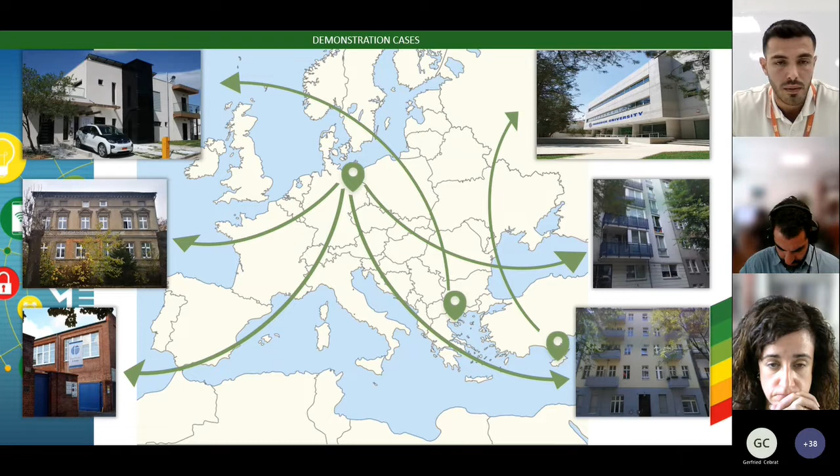In Germany, we have 4 different case studies, one of them being a multifamily home with 6 apartments. Then, on the bottom left, it's a metal factory, and there are also 2 more buildings more than 100 years old. In Greece, we have the smart house at CERTH.

And lastly, in Cyprus, we have the Frederick University, which I think we're going to see some real data from that building.

Before talking about the objectives of the project, we would like to present the drawbacks that we have defined of the current EPC methodologies.

We have detected six main challenges. The first one is limited information and data quality on the actual energy performance of the building.

Why is this? Well, because the EPC is usually done at an early stage of the building, so it doesn't take into consideration the aging of the building, and also because there is a lack of data performance during operation. The behavior of the building's users should affect the EPC.

There's also insufficient information to building users and limited user friendliness. I'm sure most of you have had to explain the EPC to a client because they didn't understand it.

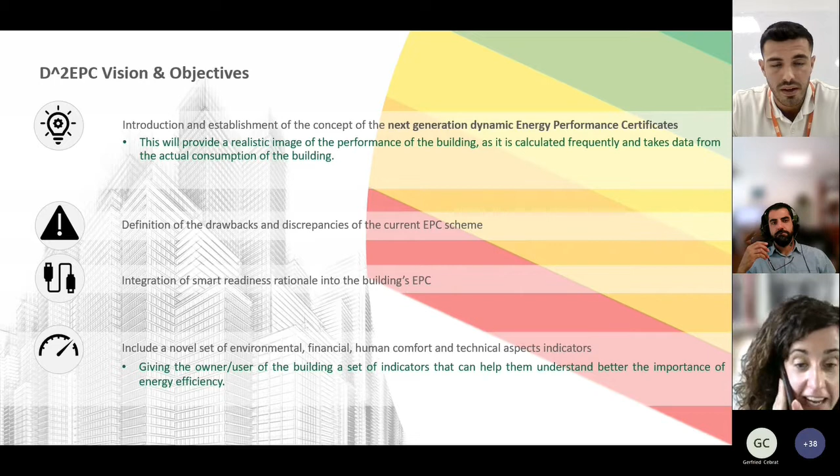We also want to introduce BIM-based digital twins coupled with state-of-the-art IoT ecosystems for the near real-time asset and operational rating assessment of the building.

As I said before, this project aims to calculate or recalculate the EPC of the building with real data from the measurement system installed in the building.

It will also provide improved AI-driven assessment recommendations toward energy efficiency and optimal comfort, and foster energy-saving consciousness. The building's user will get recommendations on energy-saving measures and also the potential economic savings from implementing these measures, provided by the AI.

And lastly, the implementation of an intelligent operational data platform for the EPC. These are mainly two: the web platform, which will be used by the EPC assessor to introduce required data that can't be obtained from the BIM file, and the GIS tool, which will mainly be used by public authorities to control the EPC of a certain area and compare the performance of buildings in that area.

So once we have covered the objectives of the project, we would like to present the objectives of this workshop. So, why you are here.

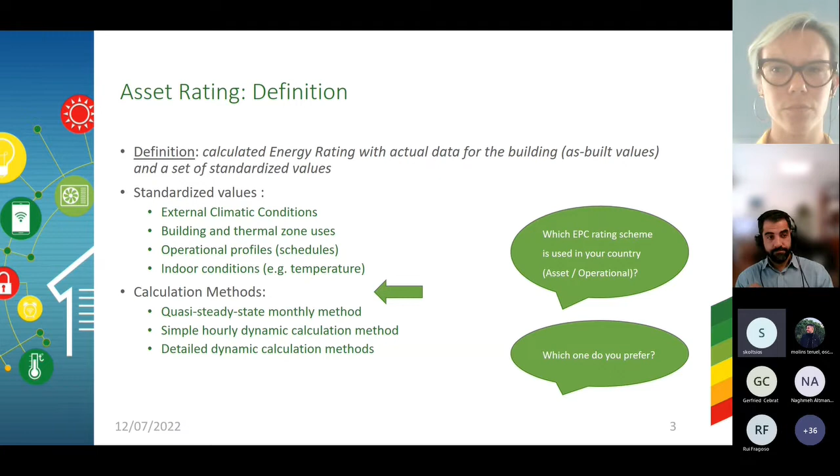And here is the first question: which EPC rating scheme is used in your country, the asset or the operational? And which one do you prefer? I am looking forward to your answers at the end of this presentation.

So the current stage of EPC adoption in the European Union: EPCs right now are a mandatory requirement for EU member states when constructing, selling or renting a building. Of the 27 EU member states, only 16 have adopted the methodology exclusively based on calculated energy consumption, the asset rating. The validity of an EPC lasts up to 10 years in most countries.

And the question is, do end users perceive it as an informative tool, or just as a burden to construct, sell or rent a building?

Right now, the identified gaps in the EPC procedures are focused on BIM documentation and literacy, or digital logbooks absence in the process of EPC issuance. In most countries, GIS information is not included. There is also a lack of environmental indicators, financial indicators, human comfort assessment, and smart metering and real-time data are not utilized in the calculation procedures of EPCs in many member states.

You can find all this information described, and even more, in our white paper D2EPC requirements survey, as well as in the publication made within the scope of this project in CLIMA 2022, as you can see at the bottom right corner of your screen.

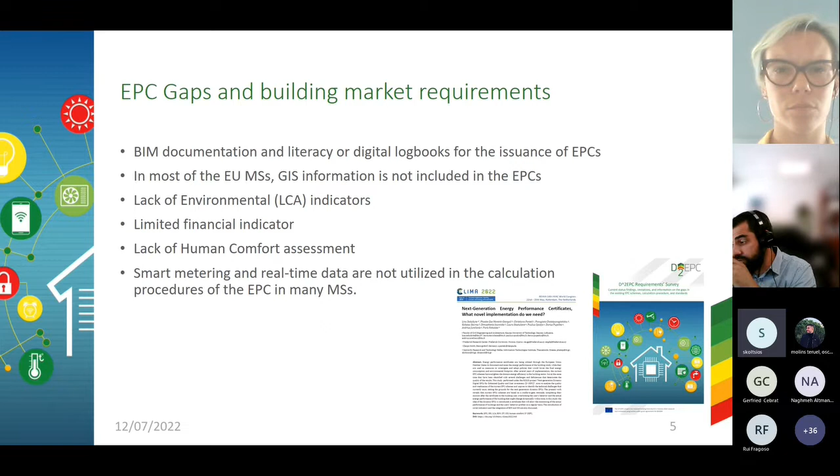So, as D2EPC, we proposed some alterations. Firstly, for faster building documentation, we propose leveraging existing build documentation procedures, and our ultimate goal is to reach the digital twin, as will be explained later. Why that? Because faster documentation means faster EPC issuance and lower cost of EPC issuance.

Secondly, as D2EPC, we think it is crucial to adopt a common European asset rating framework. Our approach is based on the European ISO 52000 series of standards published in 2017, and the development of the asset rating scheme has been based off this standard. Furthermore, each European member state preserves the characteristics of its national methodologies, like climatic data, desired indoor conditions, or the definition of their reference building according to their national building codes and minimum requirements, and also information about energy carriers like primary energy factors.

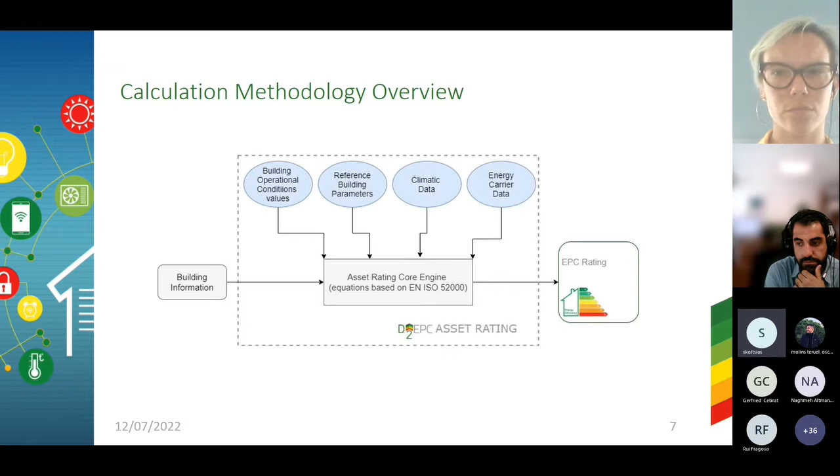So let's have an overview of the calculations performed by the asset rating module. Firstly, we need to figure out the energy demand of our building. As for heating and cooling demand, we calculate the transmission and ventilation heat losses, the solar heat gains, and the internal heat gains.

Also, we calculate the energy demand for domestic hot water, as well as for lighting only in buildings of the tertiary sector. It is not included in residential buildings. So we have the calculated values of energy demand per month.

Then we also take into consideration the installed systems in the building to calculate the delivered energy, and we take into consideration the installed renewable energy sources like PV installation or solar thermal collectors installed on the building. And then we calculate the primary energy according to the national primary energy factors.

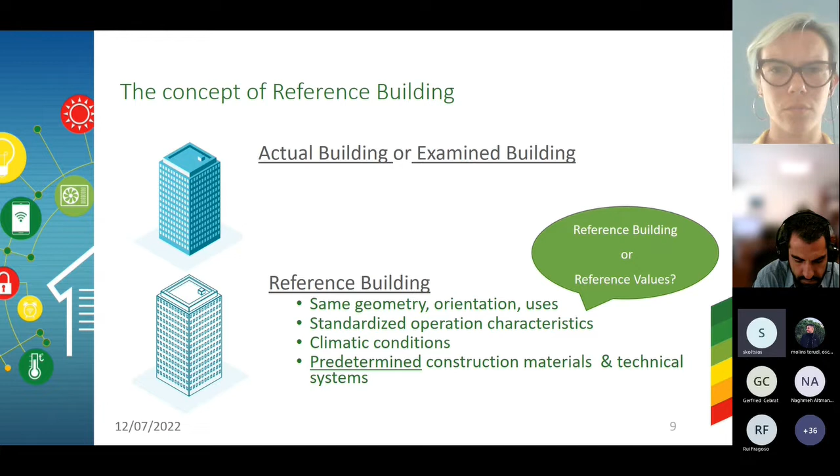Another procedure is the reference values. Let's say we calculate the energy performance, the kilowatt hours of our building, and compare it with a reference value. I would like you to think about what is the approach used in your country and which one you prefer.

And the resulted asset rating KPIs refer to the energy class, as I described, the primary energy per energy service and per energy carrier, the total CO2 emissions, and also some annual financial indicators presented for the end user to gain a better understanding.

The implementation of our methodology will be presented on the NZEB Smart Home DIH. It is a two-floor building, mostly used as its main core with orange color is residential, and there are also some office spaces in the green areas as presented on the right part of your screen.

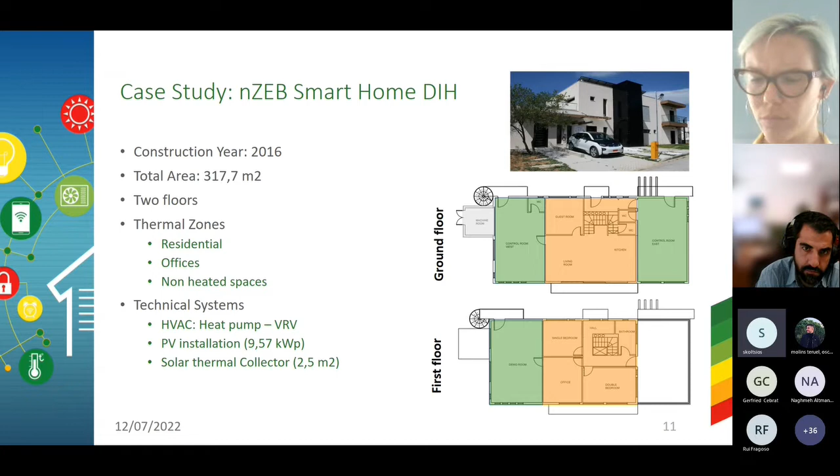There is also a non-heated space which is not taken into consideration for the calculation of energy demand. The building is equipped with heat pumps for heating and cooling with indoor VRV units, and there is also a PV installation of approximately 10 kilowatts installed on the roof and a solar thermal collector of 2.5 square meters.

Even though I would like to highlight at this moment that they are based on different ISO standards. KENAK, the Greek methodology, is based on 13790, I think, and our standard is based on 52000.

Also, the primary energy, here we have some alterations, and in both cases the resulted energy class is the highest score. In the case of KENAK, it is A+, which is the highest, and in the case of our methodology it is also A, which is the highest possible. There are two different, it is the same value in two different rating schemes.

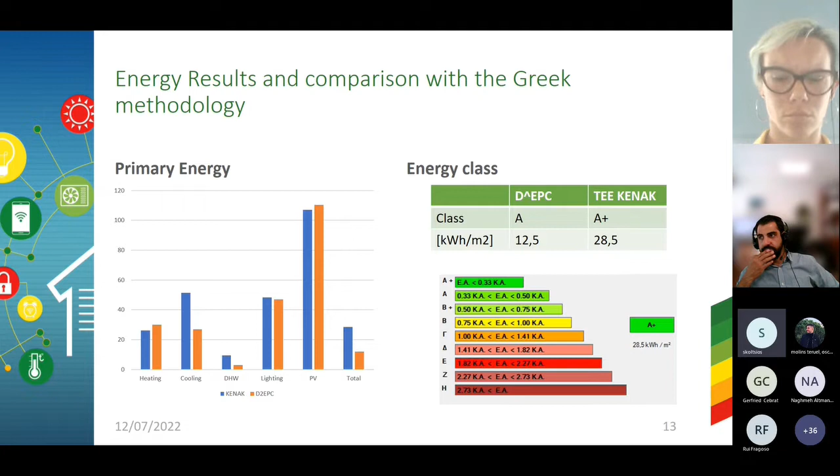And right now we have to think what else can we add to the scheme, to the certification. Smart Readiness Indicator is something proposed by the EPBD, so it has to be in the new scheme. And also life cycle assessment is something related to the building's static information, so it can be an informative indicator.

In the documentation procedure, digital logbooks can also facilitate the certification, as they provide a systematic and automatic building documentation and a holistic data model. And as I previously described, the end goal is the building digital twin.

Also, we examined the building. Now we have to find a way to make it even better. So building renovation passports are a long-term, up to 15 or 20 years, step-by-step renovation roadmap.

We can also leverage machine learning algorithms to make multiple strategic scenario generations with all the market-available alternative upgrade scenarios. And then after generating all the scenarios, we need decision support algorithms to guide us to make the proper renovation actions.

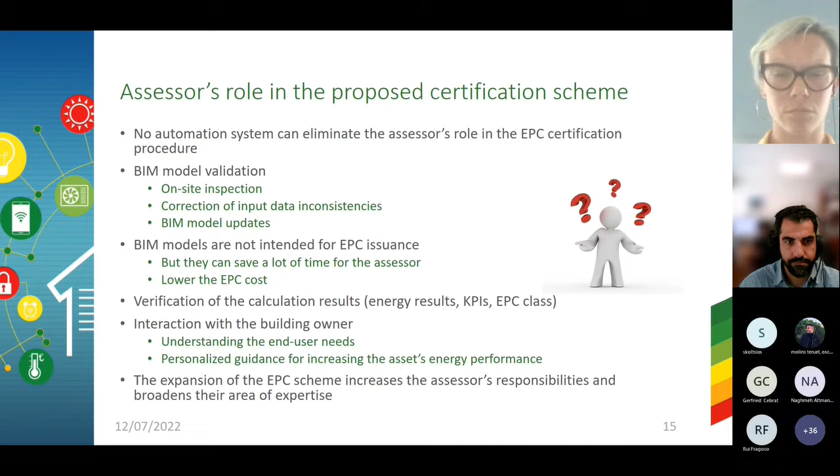The expansion of the EPC schemes only increases the assessor's responsibilities and scope and goals in the area of energy performance certifications. It doesn't eliminate him. So that's my part so far. Thank you for your attention.

I will keep sharing the list of the questions posed within my presentation, and I would like to start with the first question. Sorry, there is a previous question from Alexander. I'm sorry, I can't see my screen.

He says that the difference in consumption from KENAK and D2EPC is so significant, and if you can elaborate the reasons for this, and if you think that this will also lead to recommendations to the national authorities responsible for KENAK. I'm sorry, I have to stop sharing to see the question again. Is it on the chat? Yes, on the chat. Yes.

Yes, Alexander, the difference is—as we have searched very deep into this topic—there are some differences in the boundary conditions that we have assumed within the zones, especially for ventilation, which we have managed to firstly find and then adapt to the same values. So we have even more accurate results, even though they are not presented in this presentation. There are also some differences due to slight temperature differences. In our approach, as we tried to make a European approach, we have a unified dataset of external climatic conditions, which we have taken from JRC's PVGIS module. Right now, this is the most significant source of differences, not an error. I think I have covered your question.

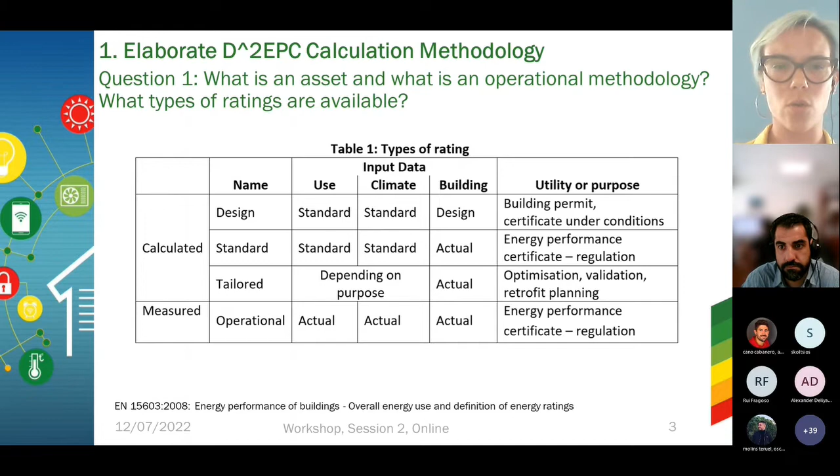In this slide, we can see that there are two types of rating, the calculated and the measured. The first one is the asset rating, and the second one is the operational rating. These are according to the European standards 15603, as well as 52000.

Here we can see that the building energy rating description regards the measured energy rating, the calculated, the tailored, the standard energy rating, and the design energy rating, which have more or less differences in the way of input of standard input data and the measurements that are used for the rating calculation. The second question is, what type of evaluation is D2EPC, asset or operational?

Concerning the D2EPC project, it's known from its beginning that it aspires to deliver the next generation of dynamic EPCs for the operational and regular assessment of buildings' energy performance through a set of cutting-edge digital design and monitoring tools and services.

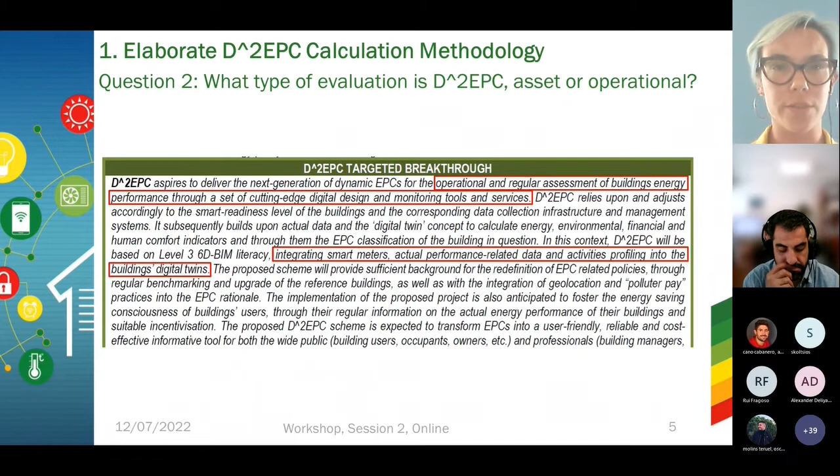In the context of D2EPC, integrating smart meters, actual performance related data and activities profiling into the building's digital twins will be presented. The third question is, if D2EPC is an operational rating, why should the asset assessment of the building be conducted by a D2EPC tool?

This is because the asset rating, the operational indicators are also taking into account the asset rating, and from that point of view, subsequently build upon actual data and the digital twin concept to calculate accurate and actual real-time energy, environmental, financial, and human comfort indicators.

So we use the asset rating and we build on this for the operational rating. The fourth question is, is there a pan-European methodology for asset rating?

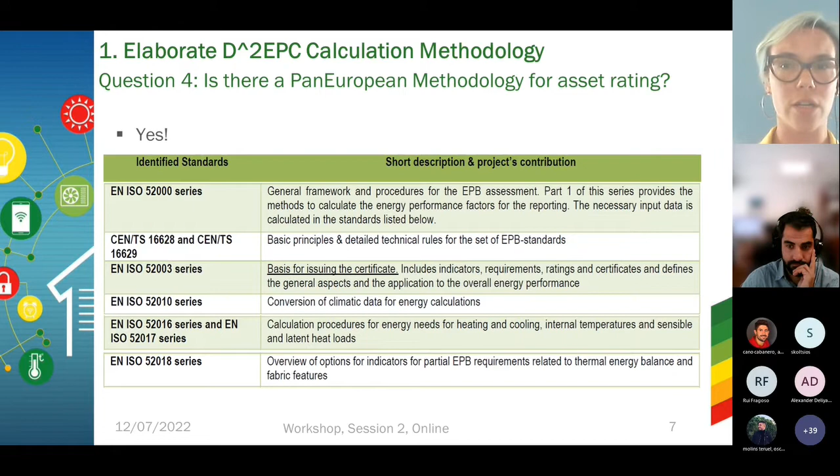Yes, and as Mr. Koltsios presented before, there are a lot of European standards regarding the asset rating, as we can see in this slide. The D2EPC scheme will be based on the relevant European standards and the Energy Performance of Buildings Directive in order to allow for a European-wide deployment. The relevant deliverable will be delivered on time regarding the asset rating as well as the operational rating.

The fifth question is, is there a pan-European methodology for operational rating? The answer is no, and that's why we are here to talk about operational rating in the D2EPC project. The updating of current standards towards dynamic EPCs is currently under work.

Specific CEN standards are in procedure to be committed under the D2EPC project, and we would like your vote on that regarding working group 5, which will be announced from the CEN Committee of Standardization.

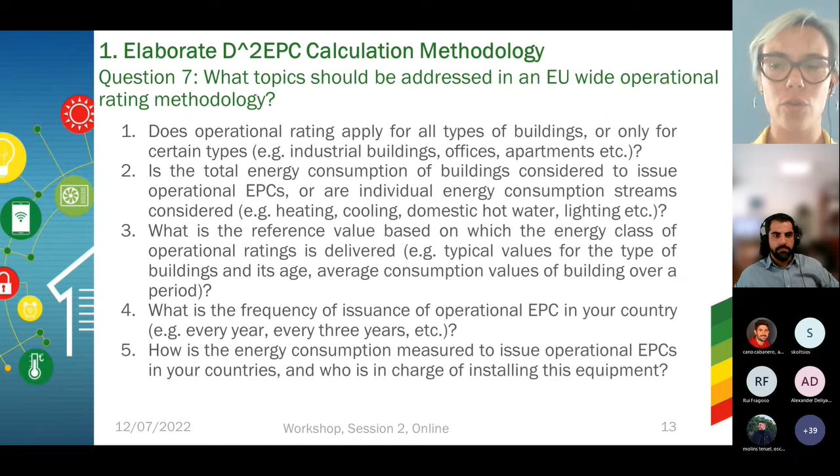Either the EPC assessors or the utility companies.

In this slide, we can see that from the D2EPC project, the energy measurements, the energy indicators were presented, and simplified energy indicators such as total energy over area per annum cannot thoroughly describe the energy performance of a building. So the D2EPC energy indicators are intended to present gaps in building performance indicators that can be utilized in conjunction with the increasingly accessible system level data from the growing use of sensors and meters in buildings to quantify and analyze energy performance.

So we have the total power, heating and cooling, lighting, and the electrical appliances as denominator of this part, we have the occupancy hours.

The methodology used for creating energy indicators values is the operational rating, and the calculations are based on the data retrieved by the building's regular measurements, where these are available. Implementing appropriate energy and environmental building evaluation techniques on a wide scale is required to stimulate market demand on sustainable practices in the built environment.

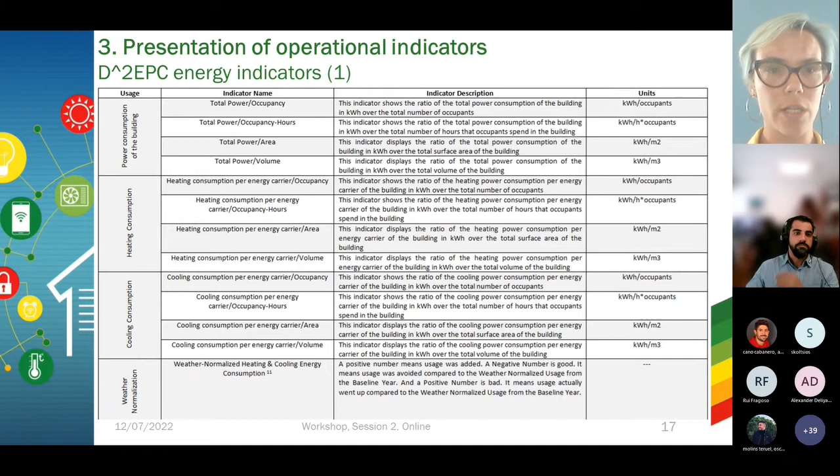Here we can see the 25 data results for the energy indicators concerning the power consumption of the building, the cooling consumption, as well as the lighting consumption and electrical appliances energy consumption.

Here we continue with the FRC pilot case study information. The building introduced in this case study is a multi-use building with quite a diverse set of spaces, systems, and assets.

The entire new wing building covered is divided into 3 separate zones, monitored in detail, and the entire building is also covered in terms of energy monitoring, providing a complete data flow that fully depicts the building's status. The building constructed in 2017 and is operating during the usual office hours as a university, as it includes offices as well as seminar halls.

So it's in the non-residential category. Here we can see that the occupancy, the surface area, and the volume per floor are presented in this table. And in 2021, indoor condition measurement devices for temperature, relative humidity, and CO2 were installed, as well as for power meter data loggers.

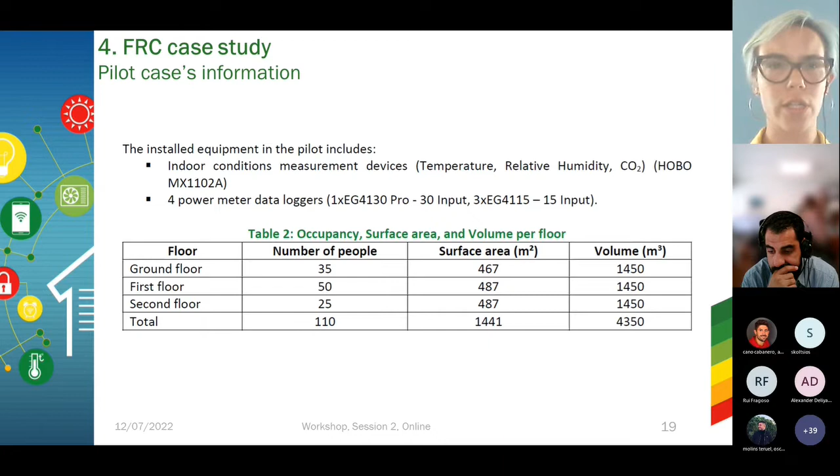And from June of 2021, and for 1 year now, 1 year was completed of actual real-time measurements, has been conducted.

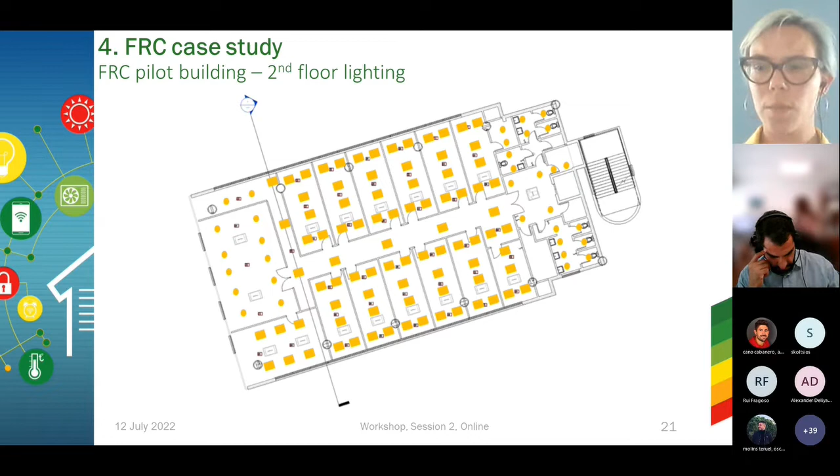And these indicators have been calculated in relation to the occupancy, the surface area, and the volume per floor of the building, as we saw in the previous slide.

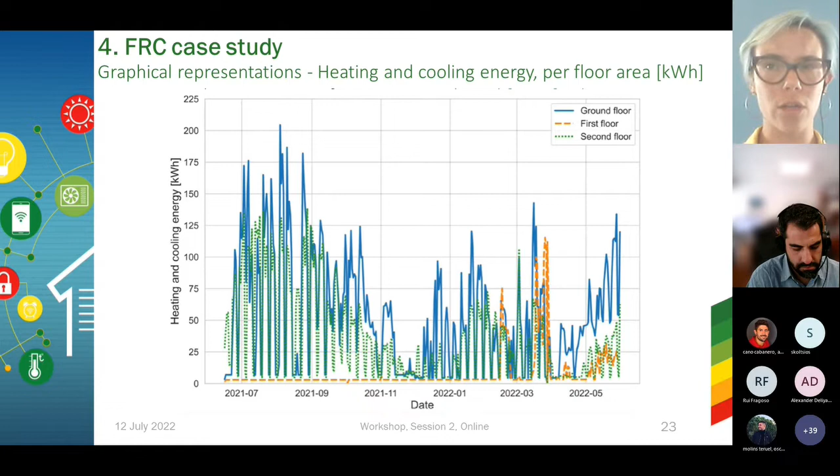Here we can see the graphical representations using the Python language coding program. And here we can see the heating and cooling energy per floor area for all the 3, for the ground floor, first floor, and second floor.

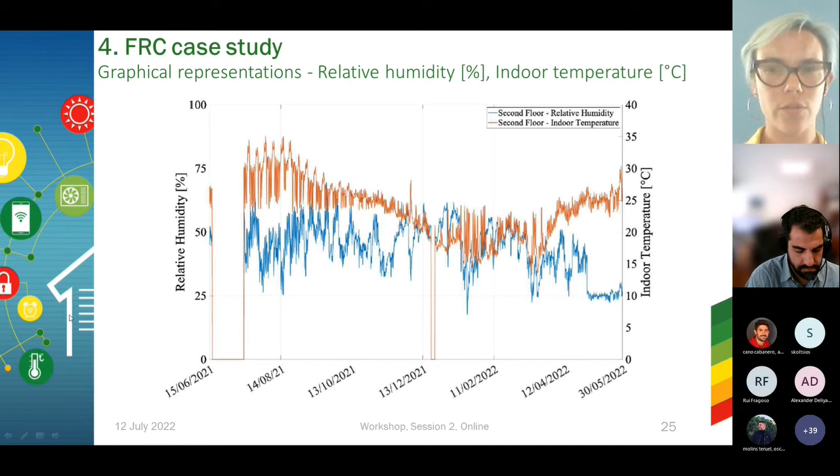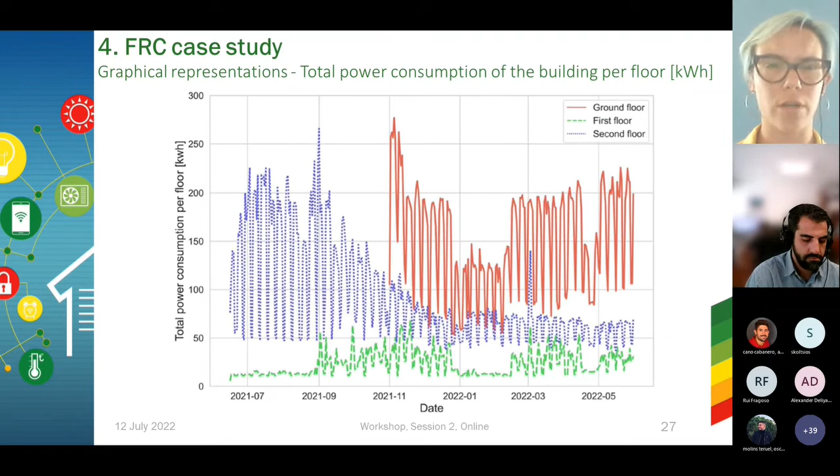Here is represented the total power consumption of the building per each floor. And the time step was per hour, but here we presented it in per month, so to have the whole year.

The energy classification of Frederick's pilot was conducted in accordance to the building stock as reference method described in the European Standard EN ISO 52003, which was delivered in 2017, and more specifically to Article 10 concerning the EPB rating.

The assessment of the Cypriot building stock was conducted in accordance to the minimum requirements for Class A buildings, according to the competent authority in Cyprus, and also the D class, energy class consumption of the building stock in Cyprus was based on the JRC technical reports.

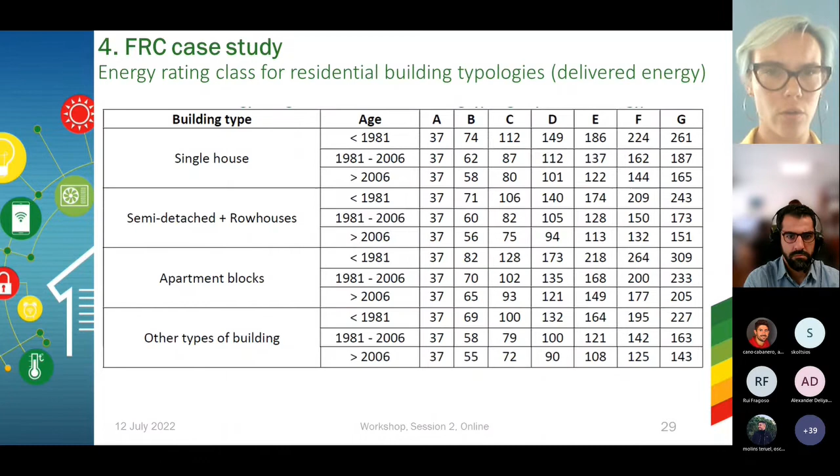So, taking into consideration these two energy classes and with linear interpolation, we achieved the energy rating class for residential building typologies, operational rating, and also for non-residential buildings. We had a time step, and having the A energy class and the D, we found the in-between classes.

So this case study building for the FRC, as it's private offices, has almost 128 kilowatt hours per... volume. We can see that it's in class B. It's indicated in class B.

So that was my presentation for today for the EPC calculation methodology for operational rating. And should you have any questions, please tell me.

Thank you so much, Phoebe. I don't see any questions on the chat. Maybe if anyone wants to ask something now. No, nothing. It was clear. Okay, thank you.

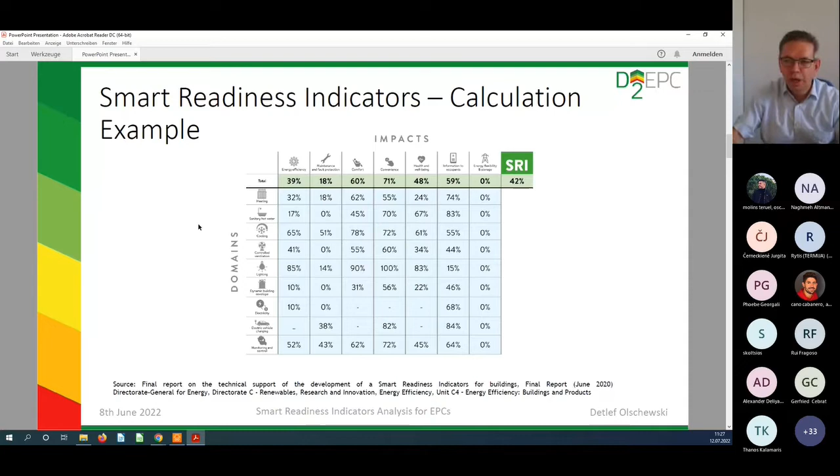I think the Smart Readiness Indicators gives us really a toolbox for how to improve the building and building data in a fully new way, which has not been seen so far.

So what are we doing with the SRI analysis here in D2EPC? We want to establish a framework and the scope of the SRIs in the next generation EPC. We're talking about things coming up in the future, just scratching the initial parts, testing and evaluating how to adapt these issues from SRI to the new dynamic EPC field. For this, we need transparent and sustainable procedures, which will define the guidelines for the realization of the SRI certification.

And maybe if you have more time, we could also discuss the different ways - A, B, C - of the smart readiness indicators, but you can also look this up on the SRI page.

One of our objectives is also to have a direct linkage of the SRI to the dynamic EPC in the future, so that you, as many of you are EPC assessors in your countries, will be able to add new services to your clients. Regular EPCs are a standard market so far, but for the next generation of services, it's very important to look both at the SRI and the dynamic EPC in the future.

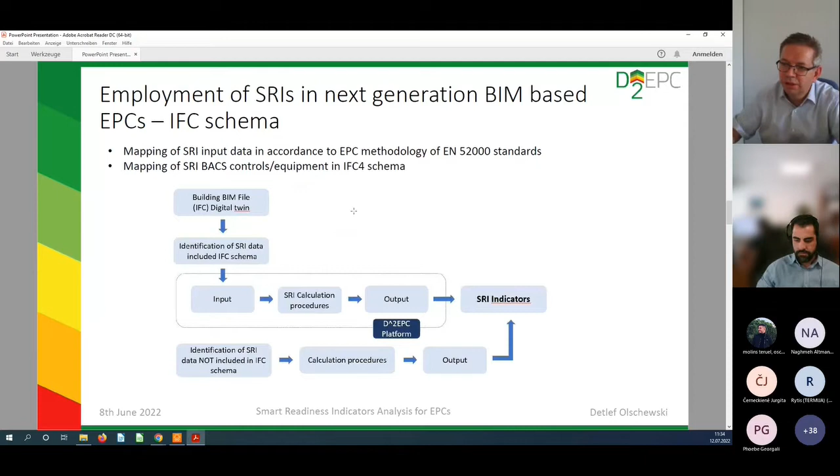And I will give you one example. I will give you some examples of how these SRI metrics are done in the next slides. So if you compare this slide here and look at this one, then you see already quite a few parallel systems which can be done here.

So here we have the staging of hierarchical levels of building automation and control systems. First thing, of course, you can just manage what you can measure. So we have sensors, actuators, and equipment, which is on the field level, the building level, so to say. Then we have the bindings and the data points.

A while ago, we were as Cleopa partners in a project called Cyber Physical Systems in buildings. This was exactly the point where we had a lot of challenges to connect these sensors to platforms in general, and this is also one important aspect which we are addressing here in this context.

The next level, the third level, is the management level, where you can really control and manage the set point. For example, with the energy poverty discussion, at least in Germany, we are discussing lowering the temperature of domestic hot water. Then you are just changing the set points for this, and this is a good example for the management level.

For the smart readiness indicators, if we have a remote control for these set points, this is much easier to do and could be much more flexible than if it's done manually, where some technician has to go there and come back. This also leads to a lot of errors optionally occurring. So here you see already some of the benefits.

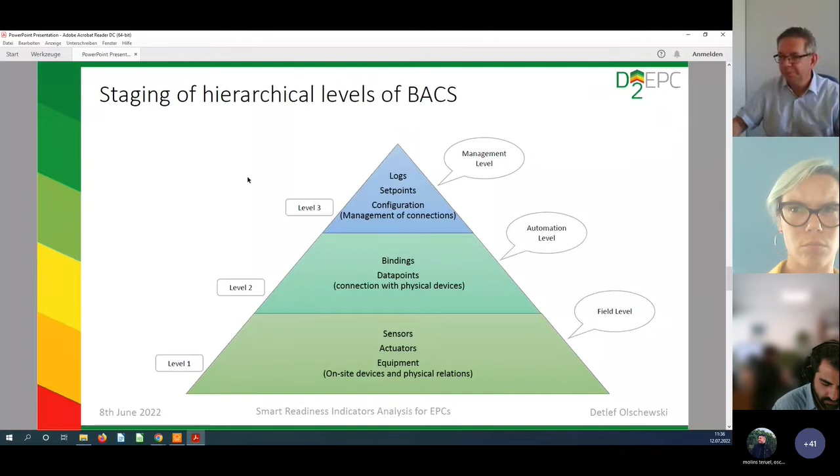I'm sorry, this is my phone. So, of this, what we are doing here in the SRI context of the EPC. Let me see, am I still good in time, or have I overdone my time?

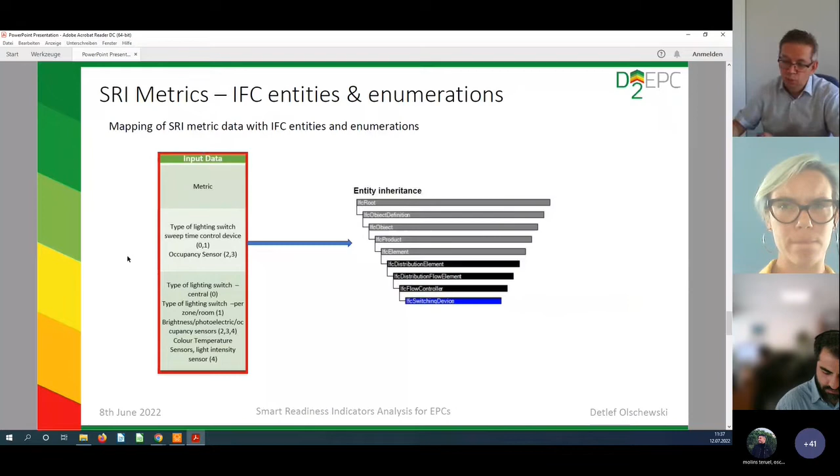So then you see here, of course, the mapping of SRI metrics and IFC entities. This is, of course, a little bit more for the experts of Cleopa, Christiana and Magdalena, who have much deeper insight into these metrics.

And what are the conclusions of the EPC IFC-based SRI analysis? There is no easy way for the current EPC assessment to extract the smart readiness indicator. This is a disadvantage on one hand, but if you have a fully new product, a fully new service, or a certificate in this case, then you need to expect that some things will need to be fully newly developed as well.

So a limited number of information can be extracted, and you see this list there. Currently, a significant number of functionality levels are not addressed in the IFC schema, but this is of course obvious because IFC has a different scope and a different objective. So, SRI cannot be IFC, nor can IFC be SRI. The information supported by the current IFC level is limited to the field level, supporting the definition of devices and wiring relations, and disregarding the logical and operational aspects, such as control loops, bindings, or configuration management.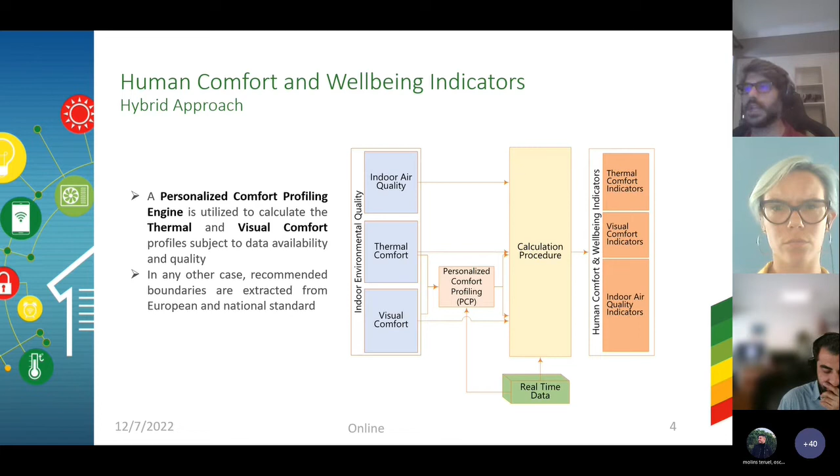A few words on the personalized comfort profiling engine. As mentioned previously, it analyzes the collected data from the pilot infrastructure and identifies the occupant's comfort boundaries. Through the usage of this engine, we imply that the optimal visual and thermal conditions for the occupant are detected by her or himself.

By this we mean that we consider the user will tend to specific actions that alter the indoor visual and thermal environment in order to adjust it to his or her likings. This automatically means that all those user profiles extracted by data must refer to regularly occupied spaces by the same occupants, in order to be precise as to whom we address these boundaries.

These trends and patterns in the user's past data are examined and used as inputs to our engine, which comprises several data manipulation and machine learning algorithms for classification, and they ultimately define these comfort boundaries. As I said before, we begin with metrics obtained from the literature - well-defined, measurable environmental parameters.

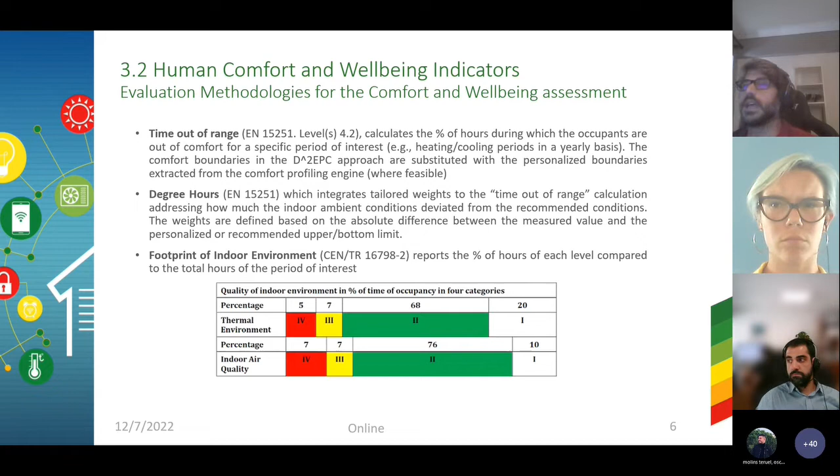With all this combined information, we managed to set 5 thermal comfort indicators. These indicators focus on the indoor dry bulb, or the well-known air temperature, and the indoor relative humidity. Both are well-defined metrics that can be measured relatively easily with IoT equipment, which is available and cheap.

And we further included two indicators that are based on two thermophysiological parameters, which assess the thermal comfort environment as a combination of the air temperature and the indoor relative humidity, which play a significant role in the thermal sensation of the occupant.

In the visual comfort case, the literature review showed that the measurable metric, well-defined with relatively cheap IoT devices, was the indoor illuminance. The indoor illuminance can be measured inside the space. There are several levels from the literature that deliver specific limits and values for the illuminance that should be maintained, based on the nature of each visual task.

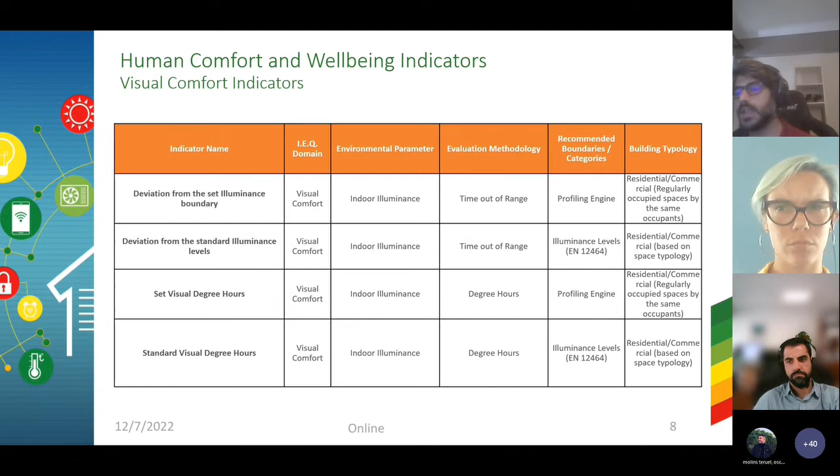And for the air quality indicators, a complete air quality assessment expects a multitude of parameters, most of them concerning gas concentrations that are harmful at higher concentrations for the human respiratory system. This is, of course, not always feasible to apply in pilot cases, especially in residential cases.

So we have segmented the air quality indicators into main and complementary, based on a techno-economical feasibility analysis that was performed to see what we can purchase as IoT devices and what is already measured in the D2EPC pilots, since the majority are already equipped with IoT infrastructure. We ended up with carbon dioxide indoor concentrations, volatile organic compounds, and particulate matter of 2.5 diameter as the main indicators to be calculated for the D2EPC pilots.

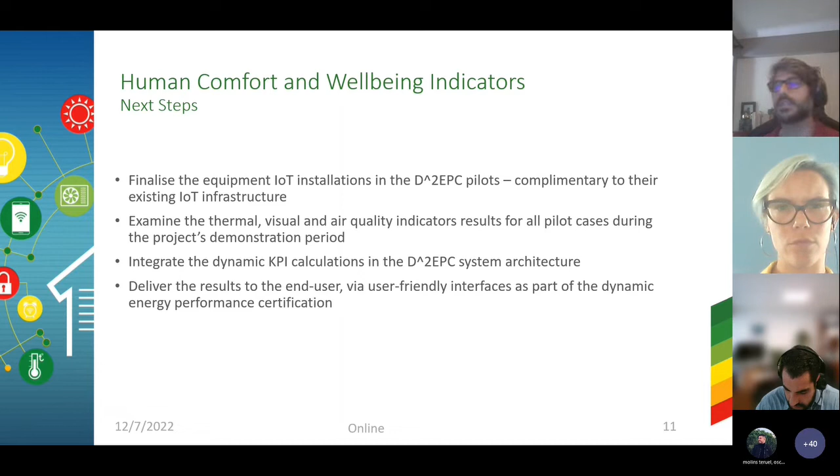Thank you very much, and I'm at your disposal for any questions.

Thank you, Damis. Maybe I was a bit fast, sorry. There's a question from Gerfried. I think he's asking if there is some factor or indicator for natural lighting. I don't know if you can see the chat. Yes, I am reading the question. Give me one second, Oscar. Thank you very much.

The natural lighting is incorporated in the analysis. We take illuminance measurements, so the illuminance measurements from a space might come from either natural or artificial lighting depending on the hours per day. During night hours, we completely refer to artificial lighting. So this is an indication of a connection between light, visual comfort, and energy consumption due to the lighting appliances.

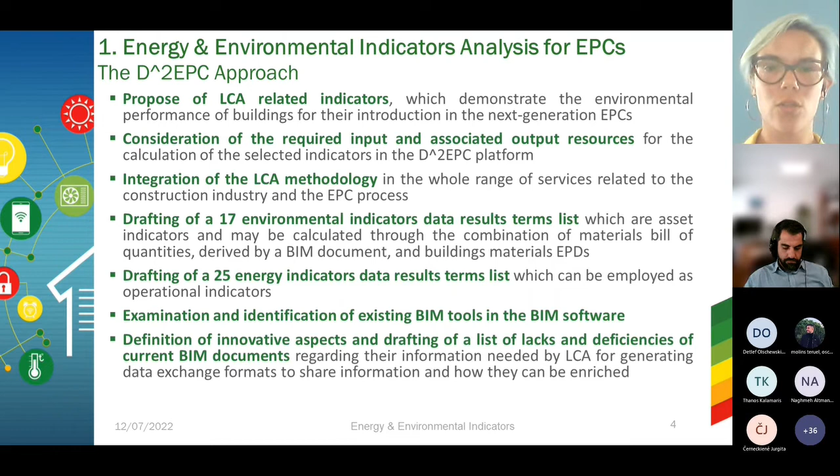As well, we have concluded under the D2EPC project the drafting of 25 energy indicators, as presented earlier, which can be employed as operational indicators. It's the examination and identification of existing BIM tools in the BIM software. And last is the definition of innovative aspects and drafting of a list of lacks and deficiencies of current BIM documents regarding the information needed by LCA for generating data exchange formats to share information and how this could be enriched.

In this slide, we can see the concept of sustainability assessment of buildings according to the European standard 15978, which includes the environmental, social and economic financial assessment and indicators. The work program of CEN 350 includes standards regarding the sustainability assessment of buildings and the assessment of environmental performance, social and economic performance, the environmental product declarations, and also the 15942 standard, which has technical characteristics and functionalities.

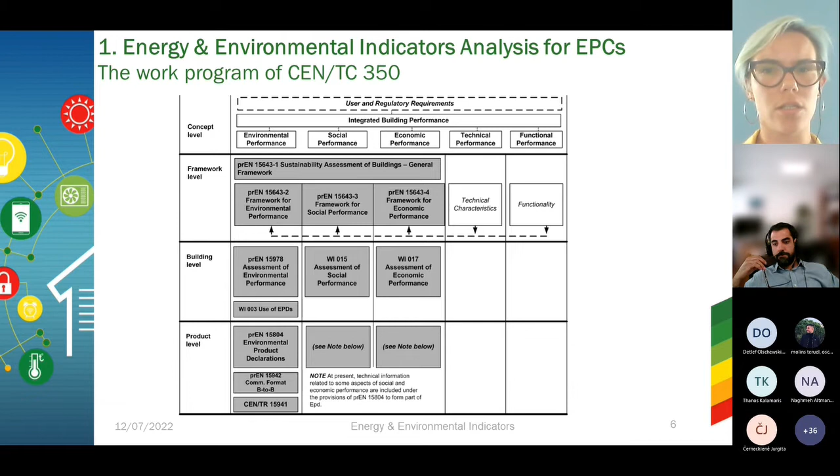Sorry, someone has their microphone on.

The development of environmental indicators was accomplished with the literature and scientific assessment of existing tools and methodologies for LCA, according to these standards, which we can see in this slide. Level(s) is the most recent European approach to assessing and reporting on the sustainability performance of buildings throughout their entire life cycle. This standard was chosen following this activity.

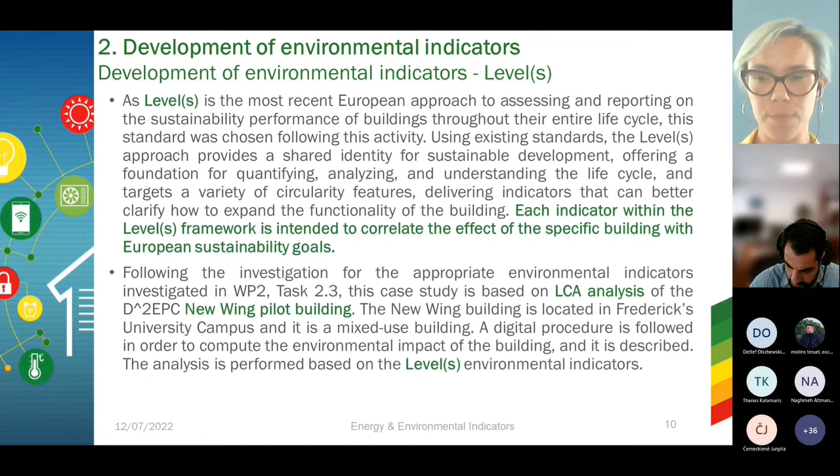In this slide, we can see that the Level(s) standard aims to provide a general language of sustainability for buildings, and this common language should enable actions to be taken at the building level that can make a clear contribution to broader European environmental policy objectives.

In addition, the Level(s) framework aims to promote life cycle thinking, and it guides users from an initial focus on individual aspects of building performance toward a more holistic perspective, with the ultimate aim being the potential for wider use across Europe of life cycle assessment and life cycle cost assessment.

In the new wing pilot building, the LCA analysis and results were extracted for the environmental indicators defined by the Level(s) database. The D2EPC includes a set of indicators related to the environmental and energy performance of buildings. The importance of employing LCA methodologies for efficient energy design of buildings and for enabling the parameterization of its embodied energy and primary energy demand are highlighted for their inclusion in dynamic EPCs, and it is mainly addressed to relevant stakeholders as well as to practicing engineers and EPC assessors, anticipating the implementation of the D2EPC project principles in building certification.

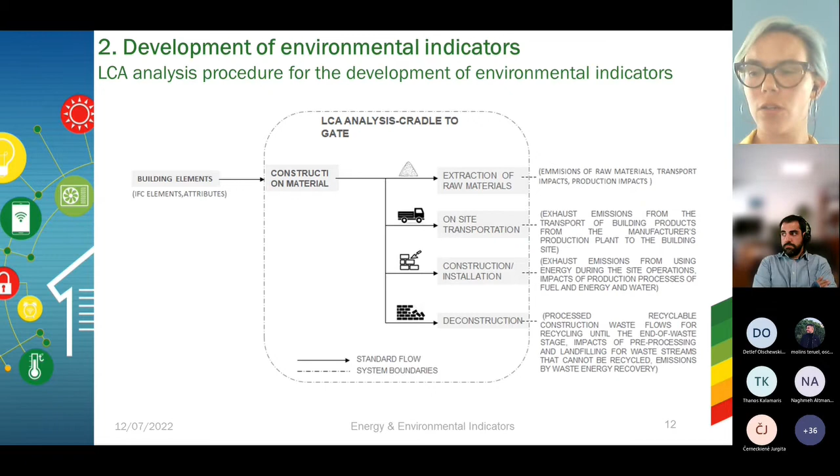The energy and environmental D2EPC indicators, which demonstrate the environmental performance of buildings, are proposed for introduction in the next generation EPCs. Here is presented the LCA analysis, showing how the material is extracted, transported, constructed, and deconstructed at the end of its life.

The extraction of the LCA results of the environmental indicators for a building through a BIM file is presented in this slide. The results are extracted based on the environmental indicators of the Levels standard. Through this analysis, the values of the environmental indicators depicted above are shown in detail for stages of construction materials, transportation to site, construction installation processes, and the end of life, as well as the total values for each indicator.

As a result, the environmental footprint for each construction material and each category of the structural element is observed.

Here we can see that the LCA Levels tool was used in the assessment, and a complete list of 17 data result terms is presented in this table as well as in this one, which is the continuation of it.

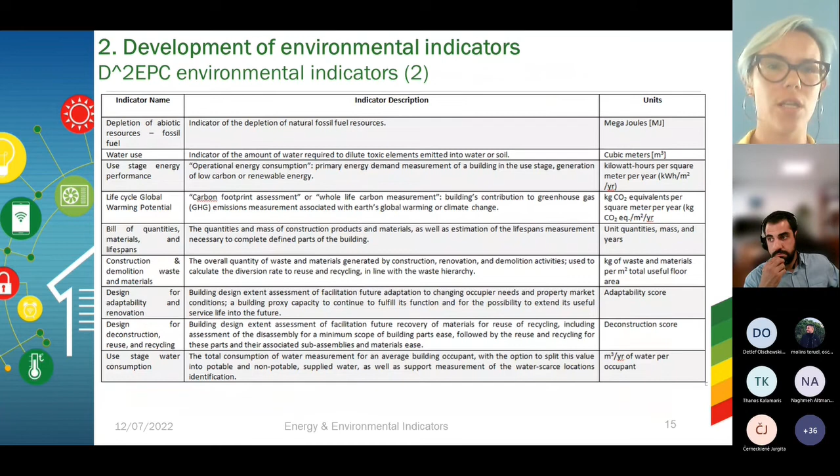These environmental indicators are asset indicators, as we said earlier, and may be calculated through the combination of material quantities derived from a BIM document and building materials EPDs. Indicatively, we see climate change, eutrophication, life cycle global warming potential, bill of quantities, materials, and lifespans, and the rest of the 17.

In this slide, we see that this procedure was used to export the LCA results using the one-click LCA software for the environmental indicators of the pilot building. According to the software database, the parts of the building were designed and given the possibility to integrate the information of real data concerning the materiality of each structural element, volume, cost, features, etc.

It was designed initially based on Revit design tools, and afterwards the LCA analysis was conducted with the one-click LCA. The general procedure to extract LCA results through a BIM file was based on the environmental indicators of Levels, in compliance with the European standard 15978.

The design and construction of the building envelope has taken into consideration all the aspects that ensure safe and energy efficient construction. The BIM materials were matched with the LCA library materials, and the information on the quantities and type of material were transferred for the needs of this document to the software. All results of the indicators were received via tables and graphs.

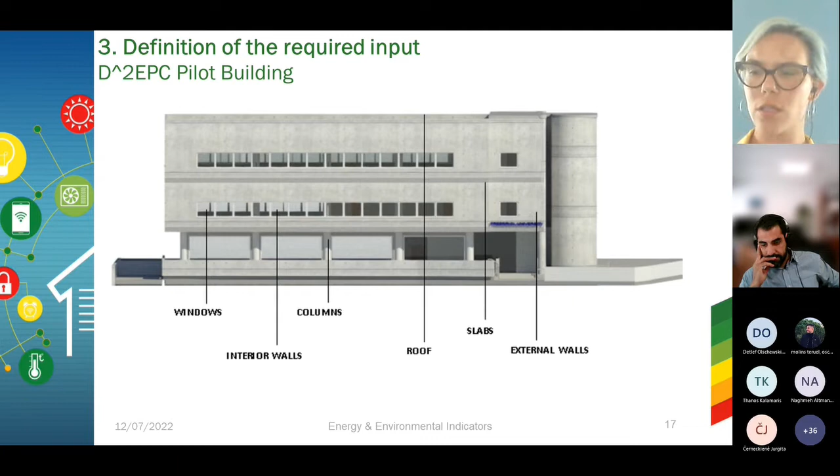Here we can see the list of building parts and the BIM software database. The attributes of each structural element were defined based on structural materials and its characteristics. In the case of LCA analysis, the type of structural element, its materiality, thickness, and volume were needed.

So the analysis of LCA was conducted through a plugin. BIM attributes were matched with a library of materials, as already said, and then all the results of the indicators were received through this assessment.

In this slide, we can see the environmental impact assessment with one-click LCA software, where information for different construction stages are presented from the pre-construction to the end of life of the materials, according to the European standard 15643.

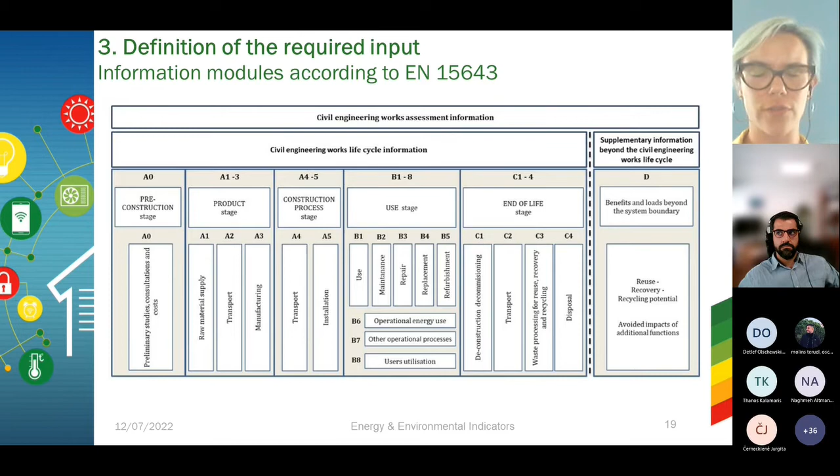Here we have the results related to the life stages of the building: the construction materials, the transportation to site, construction installation processes, till the deconstruction of the material. Based on the specific process of exporting prices of environmental indicators, results were obtained for the 4 life stages of the building.

Here we can see the results of the assessment concerning the pilot case of Frederick University. In the first table, we can see the results for life cycle assessment, which include the life stages of construction materials, transportation, construction, installation processes, and the end of life.

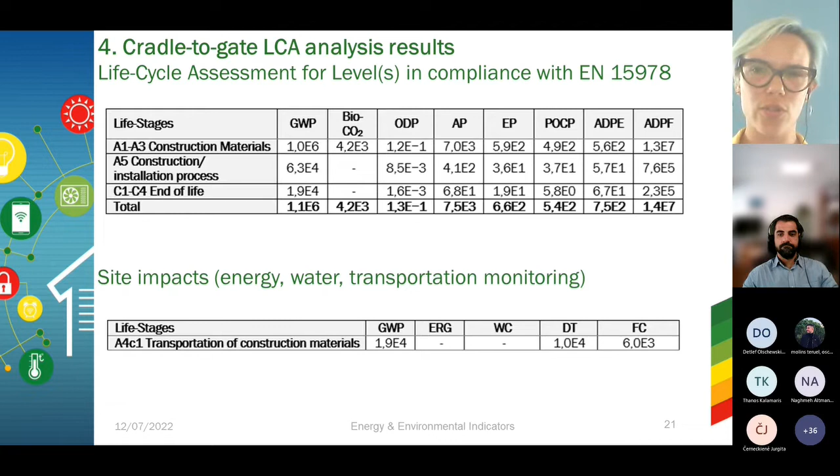The results are given for global warming potential, biogenic carbon storage, ozone depletion, fossil fuel resources and other indicators. In the second table, we can see the results for site impacts, where only the assessment for transportation of construction materials was taken into consideration, because the rest were minimal.

In this last slide, we see the presented results of the indicators describing the usage of primary energy and water. It includes the use of net fresh water, total use of primary energy, total use of non-renewable primary energy, the use of renewable primary energy resources as raw materials, and the total use of renewable primary energy results.

As we can see from this assessment, it concluded that construction 4.0, which is based on the digitalization of industry and industrialization of processes, could be used to achieve sustainability in the construction sector in general. And the integration of BIM and LCA could help in the sustainable renovation of non-residential buildings in the future, as well as in residential buildings.

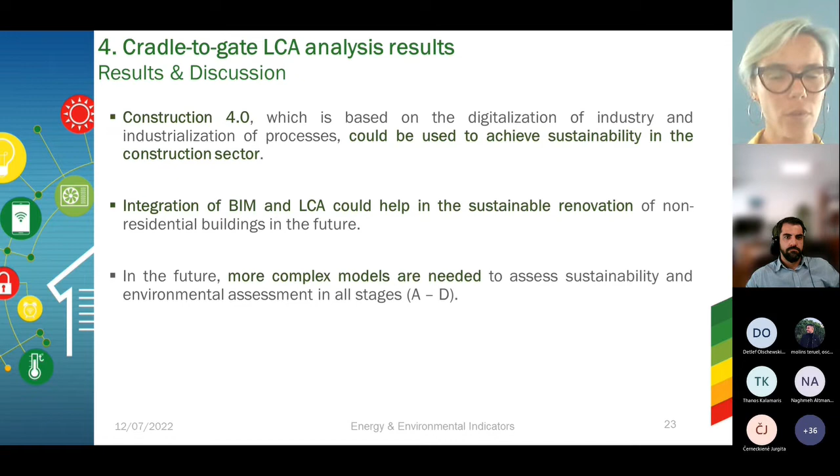In the future, more complex models would be needed to assess the sustainability and environmental assessment in all the life stages of products and materials. Thank you very much for your time, and if you have any questions, I'm here to answer them.

Thank you, Phoebe. Alexander just asked something. Okay, I will read it to you. I understand that the work with the... Thank you, oh okay, I can see it. Thank you, the amount of, is this one, right?

Yes, the amount of environmental indicators seems very extensive. I understand that the work with the BIM attributes plugin now provides ready-made tables covering elements and materials most often used in common buildings.

Yes, we input the raw materials and what we have from the BIM files and whichever information we have from the buildings and the users and the owners. And after the one-click LCA with the correct combination of the materials, we extract from this software the elements and the materials for these buildings. I'm not sure if I answered your question, but if I didn't, please let me know.

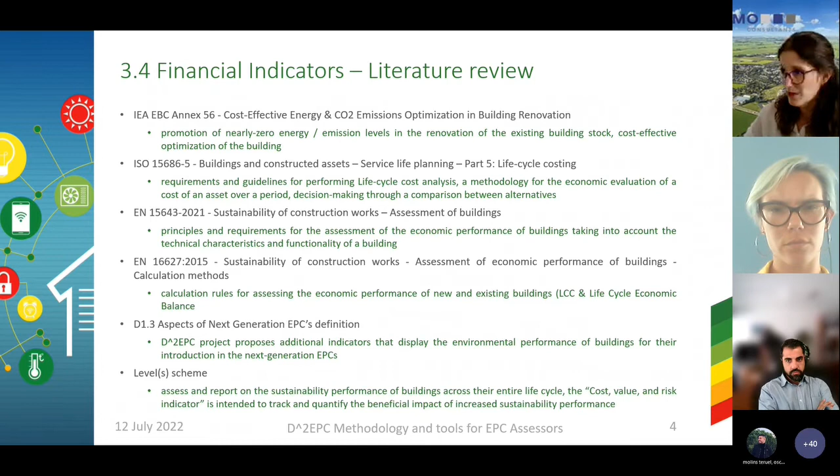So that was just quickly our foundation. But let's focus more on the methodology, starting with the definition of financial KPIs. So we wanted to provide users with a real-time image of the monetized performance of the building.

So the overall idea is that we looked at the as-operated energy consumption and translated it into monetized values, and we compared that with the as-designed energy consumption, with the as-operated energy consumption in some past time, with the predicted energy consumption, and also comparison with the building stock.

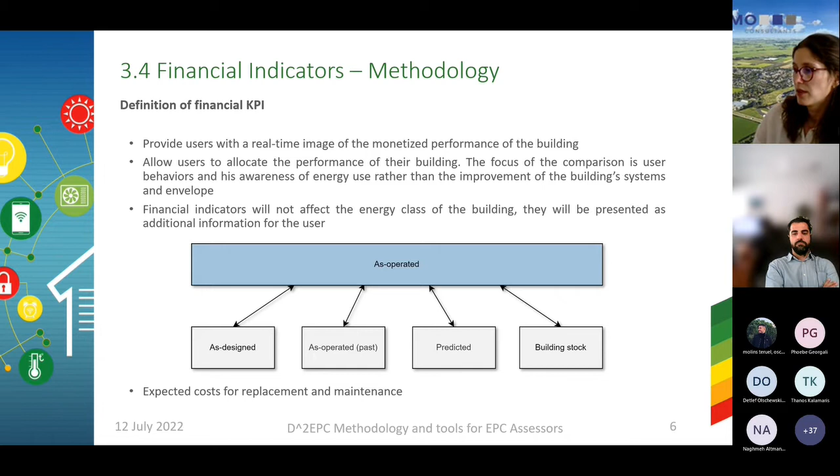Finally, we wanted to see also whether the expected cost for the replacement and maintenance of the building system, so that the user can have an overview of the future costs.

So how we can integrate that into the D2EPC? Looking at the D2EPC framework architecture, we have a service process layer that contains a calculation engine. This component is responsible for calculation to assess asset and operational performance. And within this component, we have subcomponents where the main one, building performance module, is responsible for KPIs calculation. And there are also two other subcomponents, one for asset rating and one for operational rating.

So looking a bit closer, all the inputs are coming from the digital twin, so they are based on the BIM literacy. And what we need for this building performance module to calculate the KPI, as mentioned before, we get outputs from the asset rating module and operational rating module, but some of the inputs are also required from the user. So with all this, the building performance module calculates the financial KPIs, which is the output.

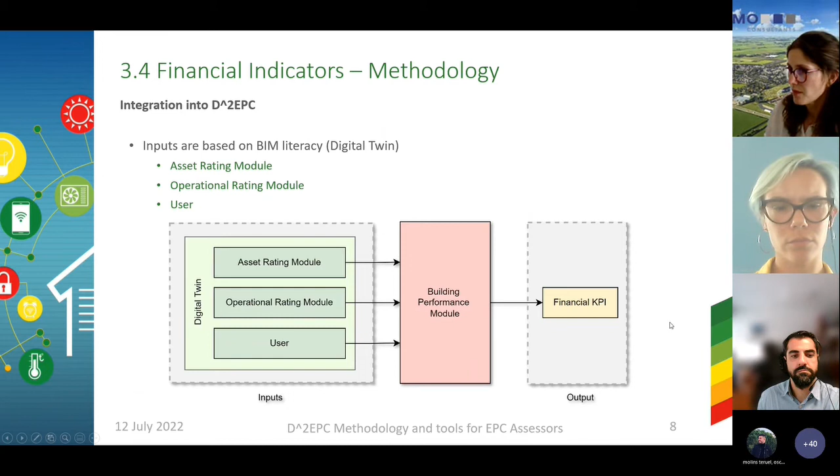So how the calculation of the financial KPIs works. First we need inputs, the most important ones are the costs. Operational utility costs are defined as cost of fuel for heating, cooling, power, lighting, water, and sewage. And since water and sewage costs are not related to energy, they're excluded from this calculation.

And then from the asset rating module, we would need as-designed energy consumption. From the operational rating module, we would need as-operated energy consumption. And these are the inputs we need from the user.

So we need price of the energy carrier. Here we decided that it would be a good approach if the user provides this information, because that way we get more accurate results. But there are also different, let's say, tariff approaches in different member states. So to get as accurate results as possible, it's best that this information is provided by the user.

Then we also need information from the user for which energy carrier, which energy use is used for each energy carrier. We would also need from the user the average expected inflation and discount rate. Again, this is because it differs from country to country. And lastly, we would need building system information if this information is not already retrieved from the BIM model. And here we're talking about the installation date and price, the lifespan of the building system, the maintenance schedule, and the price.

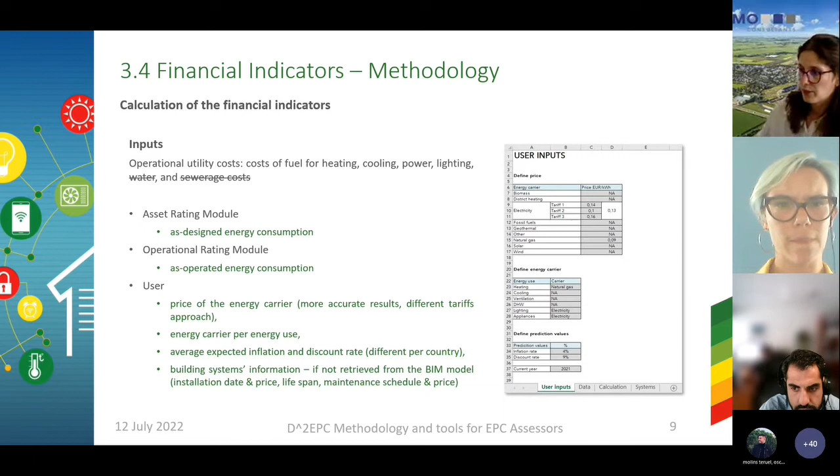So then we can do the calculation of the as-designed and as-operated model. This basically is multiplying the energy consumption with the energy price, and the outcomes we get, for the as-operated module, are the cost in euro per month per energy use, per energy carrier, and then the total cost in euro per month, per year, and per square meter. Similarly, for the as-designed module, we get total cost in euro per month, per year, and per square meter. These two models can be compared to see the difference between the as-operated and as-designed values.

Here it must be mentioned that the as-operated yearly cost in euros is a true reflection of the monetized energy use in the building, but it does not match the bills that residents receive, because some additional costs like taxes are omitted here.

Next we have the prediction model. With this one, we try to evaluate the future costs based on the inflation rate and the discount rate provided by the user, and we can calculate the real cost, the nominal cost, and the net present value. It again needs to be mentioned that the comparison between the three values is an approximation, and it just aims to illustrate to the user the impact of time and the value of money they will be paying for the energy use in their building.

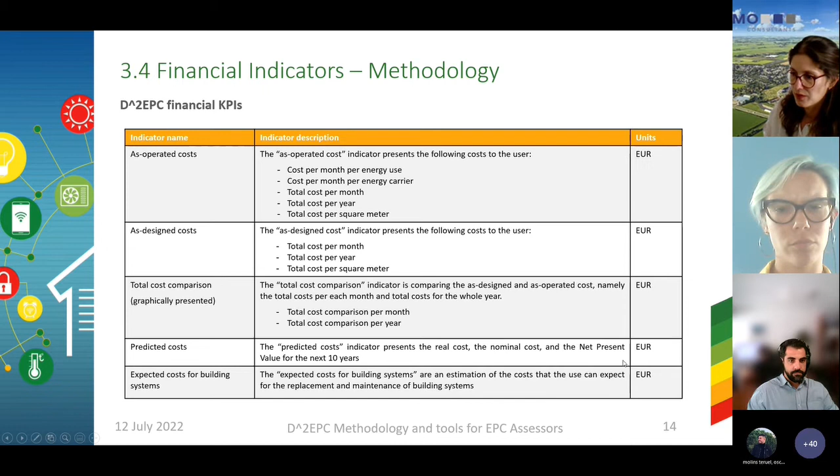With this, we concluded the methodology part, and we can go to the third step, which is the development of guidelines for D2EPC integration.

As mentioned, we had a look at the real-life example, the same building previously presented by Phoebe, the Friedrich University. It consists of lecture rooms but also a cafeteria, and has a few input meter data loggers. It has three-zone monitoring and remote sensors for CO2, temperature, and relative humidity. The measurement started last year in June, as also previously presented by Phoebe.

So first, what we had to do was examine what kind of data we can get from the measurements. This work was done in November, so it was only six months since the measurement started, and we still had to understand what kind of outputs we were getting from such measurements.

But at that time, we concluded that the available data was not sufficient for the initial calculation of the KPI. Nevertheless, it was really beneficial to understand what kind of data we get and what we can do with it, and based on that, the methodology was adjusted to better fit the purpose.

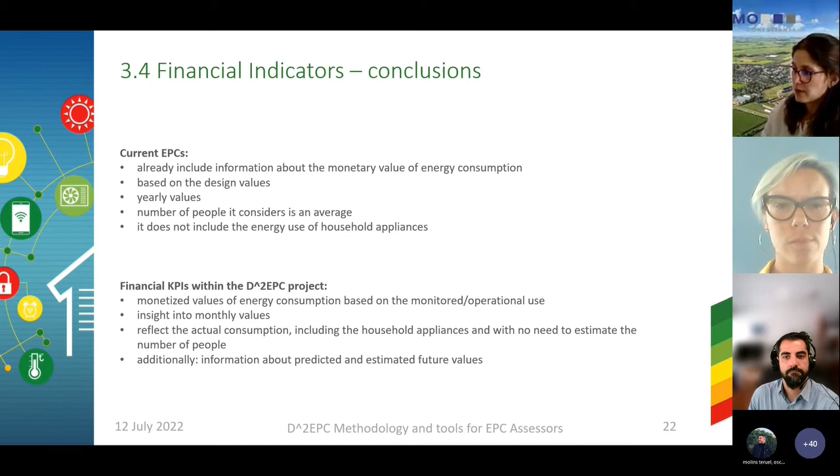While the financial KPIs within the D2EPC project show the monetized value of energy consumption based on the monitored, operational use. It gives insight into monthly values, and reflects actual consumption, including household appliances, with no need to estimate the number of people. Additionally, it also gives information about predicted and estimated future costs.

So that was all from my side. If you have any questions, let me know.

Thank you, Mija. There's a question from Gerfried in the chat: are as-designed costs corrected with degree days?

Well, as-designed costs are coming from as-designed energy consumption, and this part comes from the framework architecture, as mentioned before, from the engine. So maybe Stavros can have more information on that if he's still here.

Hello, yes of course, can you please repeat? So the question was, are as-designed costs corrected with degree days? And what I answered is that as-designed costs are coming from the as-designed energy consumption. So maybe you can have more on that. No, right now the methodology does not include degree day corrections, at least for the asset rating.

Concerning the climatic data, we consider the typical climatic values for each region, and by region I mean the climatic zone where the building is located, and there is no climatic data correction. I think this is the case for operational rating. Maybe Phoebe can also confirm this.

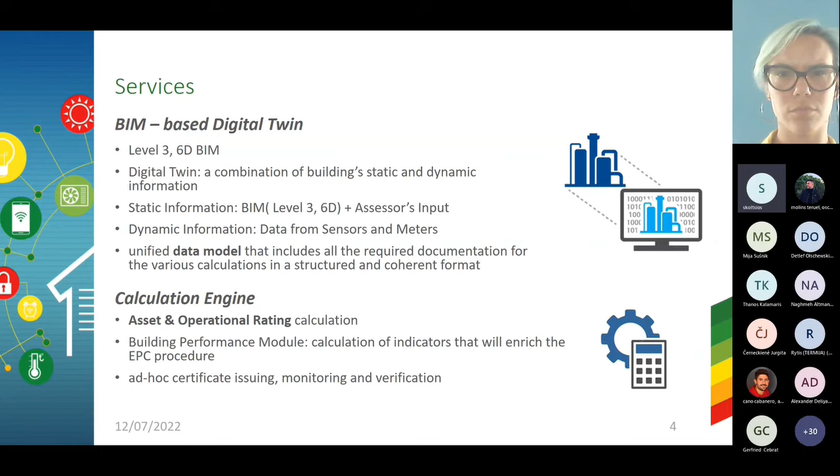Proceeding to the road mapping tool for performance upgrade, the tool performs multiple strategic renovation scenarios and provides customized recommendations for energy performance enhancement, taking into account the building and the user. We compare the building's current state with the minimum requirements, and we provide recommendations in a hierarchy list, with firstly the measures that will upgrade the building's energy performance with the lowest cost.

The AI-driven performance forecast module forecasts the building's operational conditions and the impacts that specific changes can have on the building's energy performance. Then it provides solutions for human comfort and energy efficiency. The indicated patterns that affect negatively the building's energy performance are shown to the user so he can improve his behavioral energy profile.

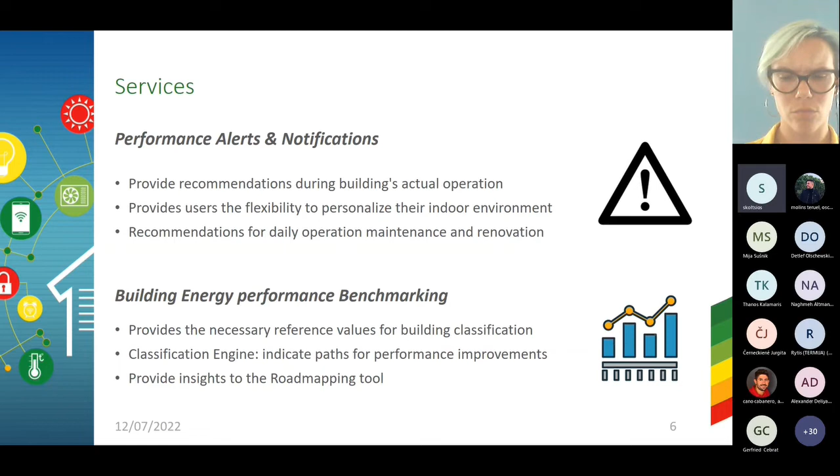The performance alerts and notification module provides recommendations during the building's actual operation, and users have the flexibility to personalize their indoor environment. Users also get recommendations for daily operation, maintenance, and renovation. The Building Energy Performance Benchmarking module provides the necessary reference values for the building's classification. A classification engine indicates paths for performance improvements and provides insights also to the road mapping tool.

Proceeding to the user interfaces, firstly the most important tool here is the web platform, where we have a user-friendly and interactive environment where the user can adjust his preferences and request execution of EPC issuance and/or any other calculation of the presented KPIs. In the web platform, we can see and issue an asset rating, an operational rating, the calculation of the KPIs.

We can see which recommendations are applied to us to increase our energy efficiency, and receive alerts and notifications for possible malfunctions in the sensoring, metering equipment, or the technical systems of our building, let's say for heating, cooling, etc.

The environment design is user-centered, which means that the owner, the tenant, or the engineer may access the web platform, but they can see different kinds of information. Let's say an engineer can understand more stuff than the building owner. So for each user, we have specified information to be shown.

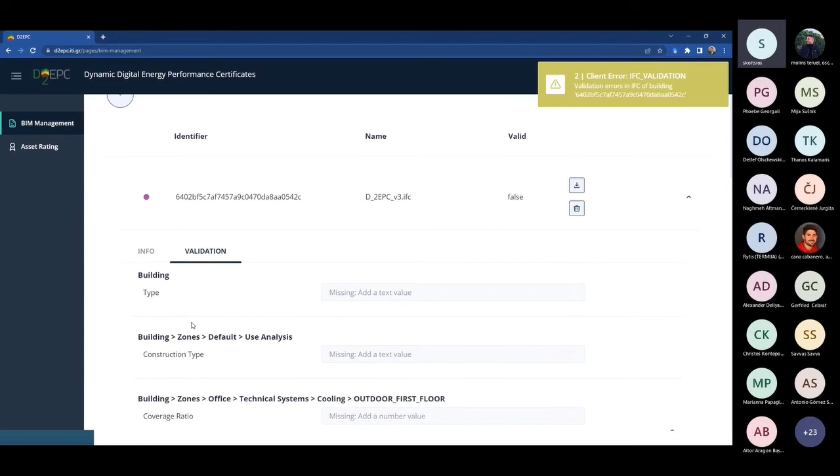As we see, there are several fields missing from the file. So me, as an assessor, or in the role of the assessor, I have to fill in the missing information. How to fill each field is described in the manual.

To begin with, it is missing the building's type, so it is a residential building. The construction type is heavy. The coverage ratio of the technical system for cooling is assumed equal to 0.5. For the sake of this presentation, we will assume all the coverage ratios equal to 0.5.

The efficiency of a boiler, it is an electrical boiler, so it is assumed equal to 1. And again, some coverage ratio values, which are typical values not included in a BIM file. For the rest, solar collector, we're missing the orientation, which is south, the letter S is here, and its tilt is equal to 45 degrees related to the ground.

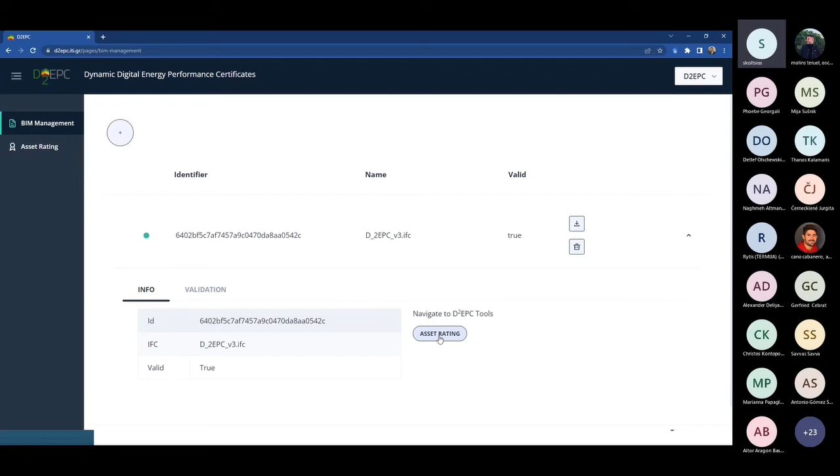So we submit the added information, and the validation procedure also runs in this case, validates the information that we just inserted, and now we are ready to calculate the asset rating.

As we can see, our building has a top class A. Its ratio, the ratio of its energy performance to the energy performance of the reference building is equal to 0.27, which is below 0.35, and that's why it is class A.

At the right side, we can see the visualization of the results. Firstly, we see the energy demand, and we can separate heating, cooling, domestic hot water, lighting, or have a total value.

We are in Greece, so we have heating during the winter period and cooling during the summer period. And we have 2 months with neither heating nor cooling, and domestic hot water is also added throughout the months, as well as lighting.

When we go to the final energy, we can see the values for heating, cooling, and as I explained in my previous presentation, we also have PV and solar thermal collectors energy provision. So the total energy is lowered by these two values.

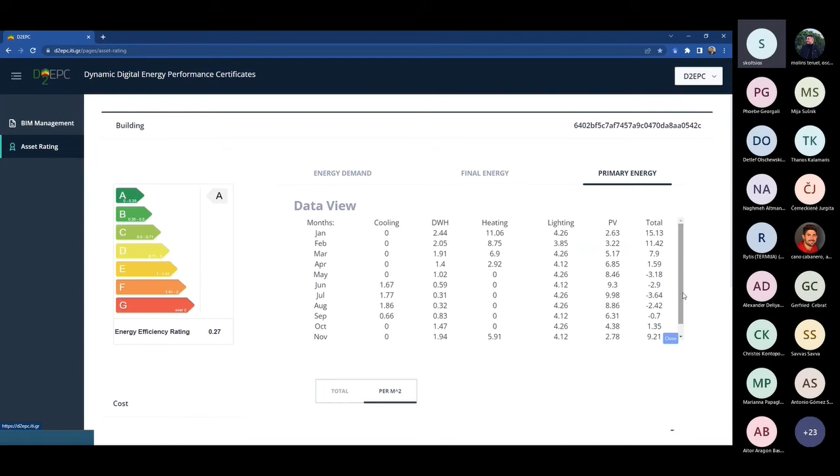Proceeding to the KPIs, we can see the total values, either kilowatt hours or kilowatt hours per square meter, per energy carrier or per energy service. Here we have per energy service, so we have cooling, heating, domestic hot water, etc. And per energy carrier, we only have electricity, as we have heat pumps for heating, and everything works with electricity.

And lastly, I would like to show the cost indicators for electricity. The total value is around 1,000 euros for the whole year. And we have the CO2 emissions for the annual operation.

So now let's go back to the presentation and have a short discussion about the things that I presented. My first question is if you would like to have a 3D visualization of the building during the procedure, and how important it is for you to have it.

Furthermore, regarding the addition of extra information to the building model, how would you like to see the missing fields? Like the way I presented previously, each field one by one, or in a big table with the other information of the building parsed from the BIM parser.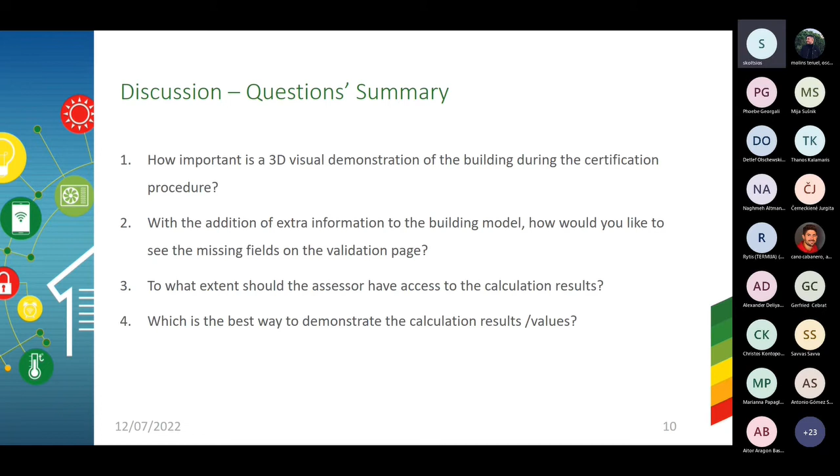Which is the best way to demonstrate the calculation results or values? Do you like the bar charts? Would you like pie charts or just plain values?

And how long do you think a final EPC report should be, like in a PDF format? Or even, is it also a good practice to have a report, or do you think it is obsolete and we need to proceed to more dynamic schemes? Thank you.

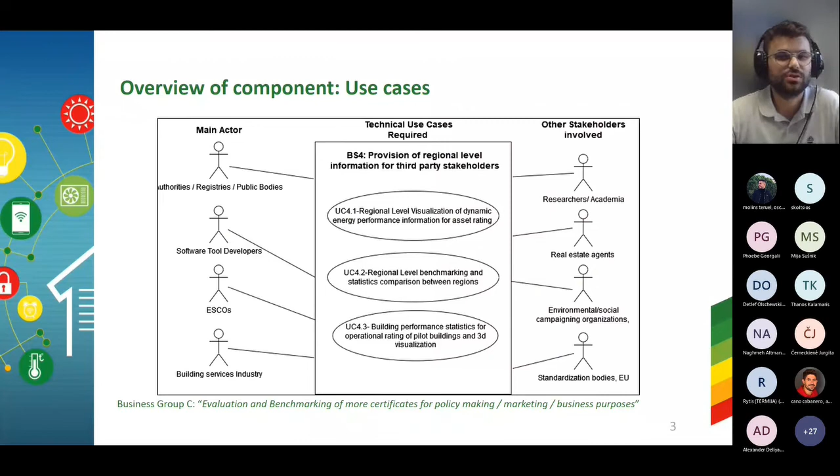The main actors for this service are local authorities, registries and public bodies. There are also companies related with the energy domain in order to know where more demand in energy needs comes from, and also the building services industry, in order to focus the provision of sales into specific regions and areas across Europe. But of course, other potential stakeholders that can be involved are researchers or academia, real estate agents, environmental or social campaigning organizations, standardization bodies, etc.

Here is the main scope of the WebGIS tool. It is a tool that can provide information about EPC documentation across all European Union member states. It produces useful analytics and provides information regarding EPCs, and of course can provide insight and added value information services to give extra revenues to potential involved stakeholders.

The main functionalities that I will present via the live demo are, first of all, the production of EPC statistics, and second, visualizing this information on the map for selected regions. We have selected so far the official NUTS level information and regions from the European Union.

We also provide spatial and attribute queries to the users. We can publish this information via common OGC services to other software for external and offline use, and the provision and visualization of the simplified 3D BIM model on the map in an external pop-up window.

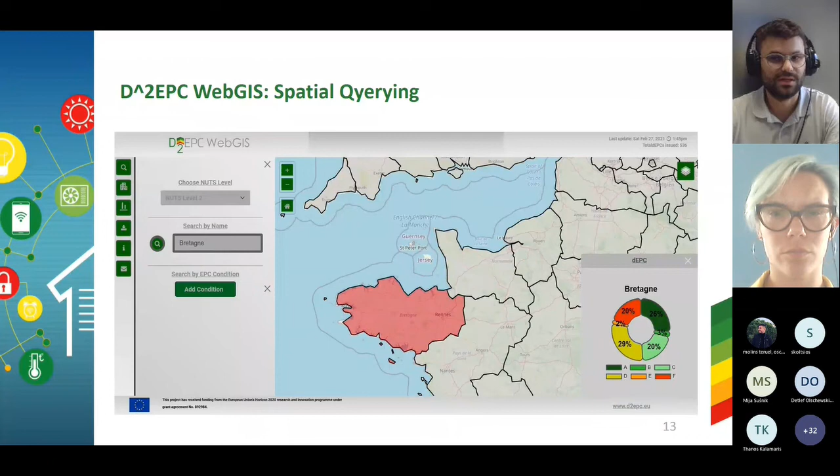Spatial querying can be applied through this specific functionality. A user can search for a specific region to see the EPC statistics for that region, and can apply attribute querying as well by adding numerous logical conditions.

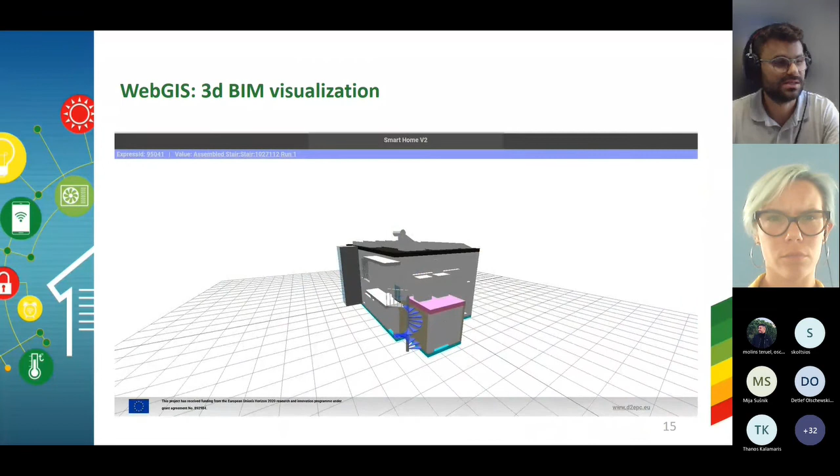The final functionality of the GIS is the 3D BIM visualization. For D2EPC, we will only integrate the pilot sites of the project, as presented at the beginning of this workshop by Oscar earlier today. This is the example of the smart house, the smart home of CERTH in Thessaloniki, and this is the visualization of the NZ smart home.

To sum up the presentation, the D2EPC GIS tool is a novel tool built from scratch for this project. It is built using only open source tools exclusively, and it is implemented to be fully compatible with the other D2EPC components, the main web platform, and the respective dependencies.

It can also be expanded with further extra functionalities, for example displaying other statistics such as materials used, so more added-value information can be extracted in a spatial manner. It offers easy integration using Dockerization methods and the NGINX web server.

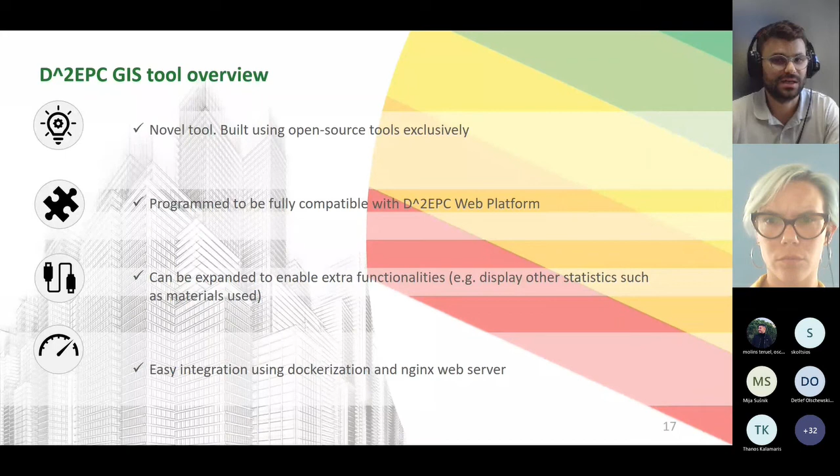So, forwarding to the live demo session.

I hope you can still see my screen. Yes, okay. This is offline at the moment - this tool will firstly have to be integrated into the general D2EPC web platform in order to be provided online publicly.

So this is the main environment of the D2EPC. As I said earlier, it offers some basic map navigation functionalities such as return to home, zoom in, zoom out, and by rolling the mouse wheel. We can select a different base map to see the results or produced graphs and plots better, but today we'll stick with OpenStreetMap.

First of all, the first thing we can offer is some general EPC statistics at different NUTS levels - that is, four different NUTS levels. For example, by clicking on France, a pop-up window appears with the percentage of different EPC ratings for France. By zooming in with a higher scale, regions are presented and we can see the information for the different regions. This is for the full European Union, including the United Kingdom.

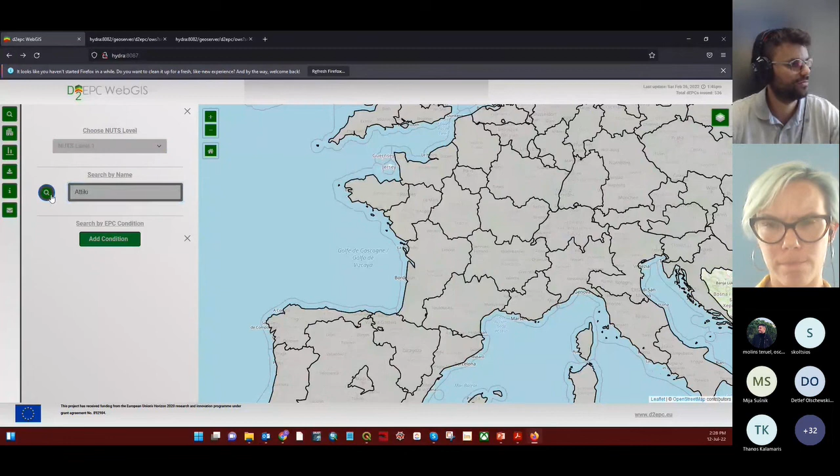For France, it's this one, etc. If I change the NUTS level to level 1, which covers big socioeconomic and administrative regions, and I put ATT, we will have the Attica region for Greece. Again, here the percentage of different EPC scores is presented for this region.

The next functionality, through querying, we can put some attribute querying through parallel logical conditions. For example, if I want to find across Europe some extreme cases where we find regions, let's say at NUTS level 2, that present a big percentage of A's and also F's—a percentage of A score more than 20%, but also F score more than 20%—we put that as AND and search.

So it was indeed an extreme. I shift the percentage a little bit, and we can see the results for all the regions. Again, all this data is dummy data for this purpose, but we offer, via the D2EPC project, the methodology to incorporate real derived EPC data to populate the respective database.

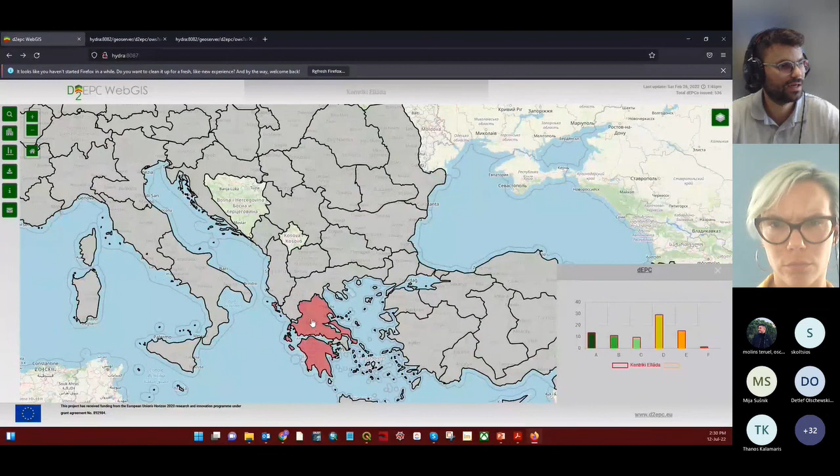The next demo I would like to showcase is the comparison mode. Via the comparison tool, an end user can select two different regions across Europe and check the percentage and the score derived for the different EPC scores.

For example, for a public authority, in order to provide financial motivations or funding opportunities to specific regions, it would be really important to see the exact state of EPC energy scores in different regions across Europe, and make the respective comparisons.

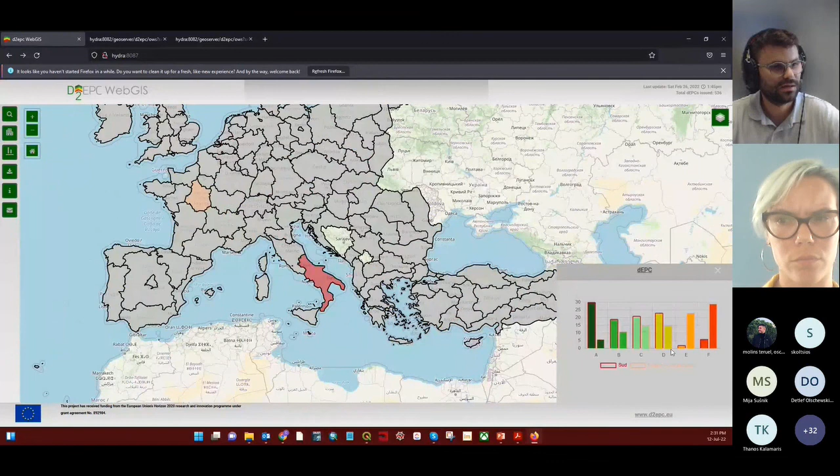Again, I think this is pretty straightforward. Also, the 3D visualization of the simplified BIM file that can be uploaded—this is for the pilot cases so far.

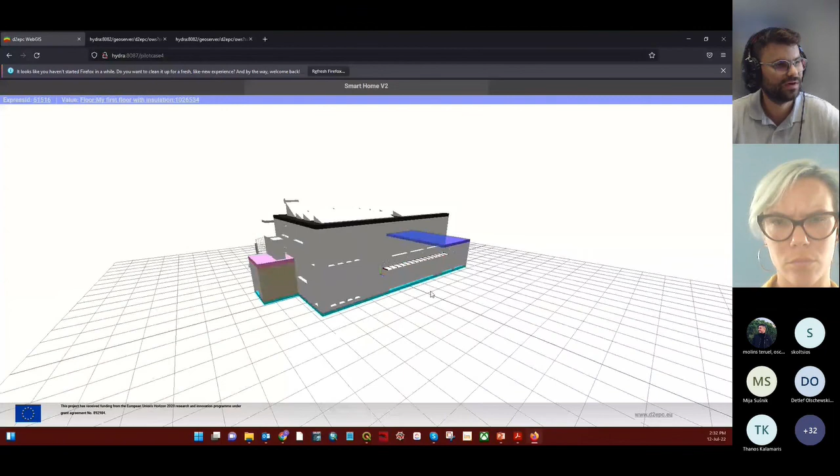So, for example, for Thessaloniki and the smart home of CERTH, by clicking this, its exact place is highlighted on the map, and by clicking on this cursor, we can navigate in the 3D space to the BIM file that is uploaded. By clicking on a specific object in the BIM interface, we can get the information of this exact element above here.

So maybe this is also an additional feature for an engineer or an EPC assessor responsible for a building, to see that all the information is being put correctly together.

Finally, last but not least, we can have some information about the project. This is not yet incorporated, and we can also send feedback via a specific mail.

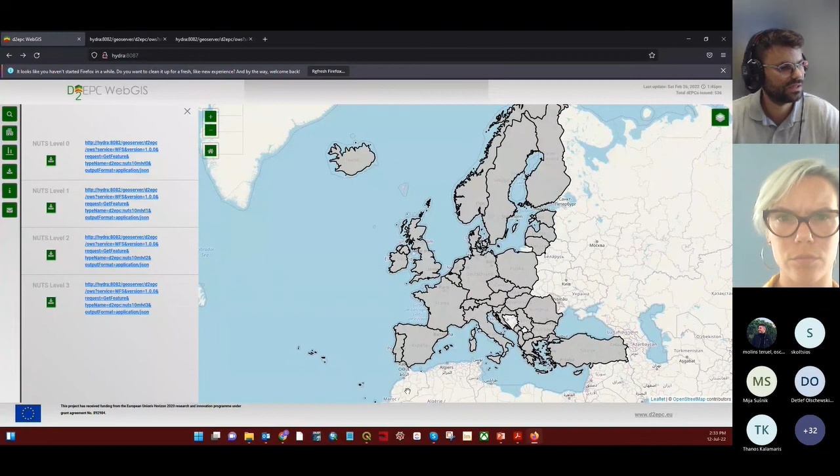And also we have the OGC services. These are the OGC service links of the different levels of NUTS regions that I demonstrated. For example, if I take any of these WFS services and use a common GIS or remote sensing software—most of these, such as Quantum GIS, QGIS, an open source GIS software—

we can add this link as a layer, putting here the respective link, and we can select the level of NUTS that we want. For example, this is for the level 2 NUTS region.

So all this information from the D2EPC database can now be handled offline if we save these features as a vector file, by anyone concerned—by an engineer or by an EPC assessor maybe. So offline we can handle this data and perform any kind of maps, export maps, or perform any further analysis.

The information, as I said, can be provided here, and it is really intuitive. It offers all the numbers and the percentage of different scores for each region.